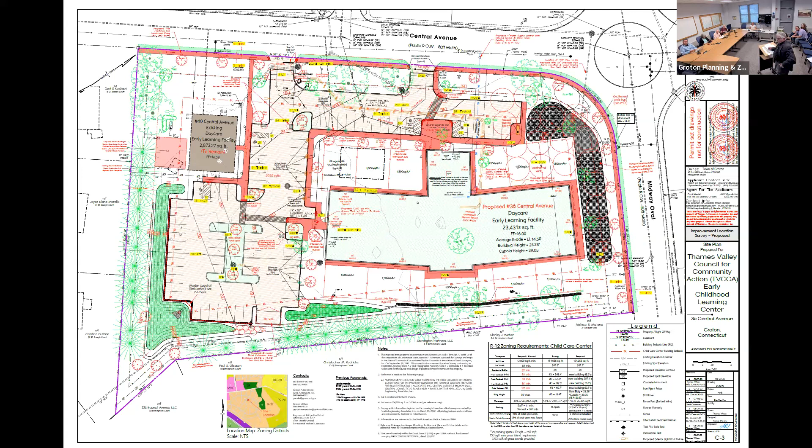So we do have a phasing plan. Paul, can you go to that last sheet? Actually, we were out there yesterday trying to come up with some type of compromise for this. I think that was the last sheet.

On the sheet that we provided as one of the revisions, with notes for the construction sequence, we're going to work with the contractor and TVCCA to try to maintain that one building. So what we're proposing now just came in - I think Deb, you might not even have seen this, we emailed this yesterday, so I'm sure you might not have seen it.

There is an area just in front of number 40 that's grass right now. So what we're proposing is to put temporary parking, processed stone and processed gravel there for students to get dropped off, and staff parking would be on the basketball court. There is a 24-foot right-of-way road going down the driveway for two-way traffic and emergency vehicles if need be. The yellow to the north would be all construction fencing, so the entire site would be protected.

So we propose all the construction to the north, and as the parking gets developed, we can close off the staff parking down below, complete the finished parking, and then complete the basins to the south that we need to get done. So that was one of our proposals.

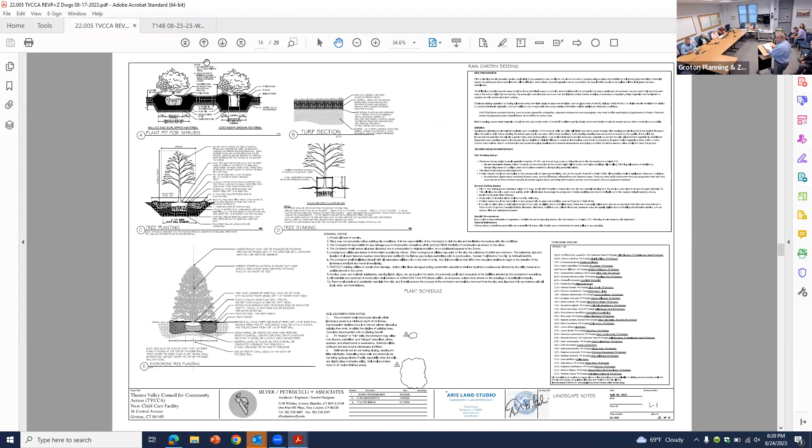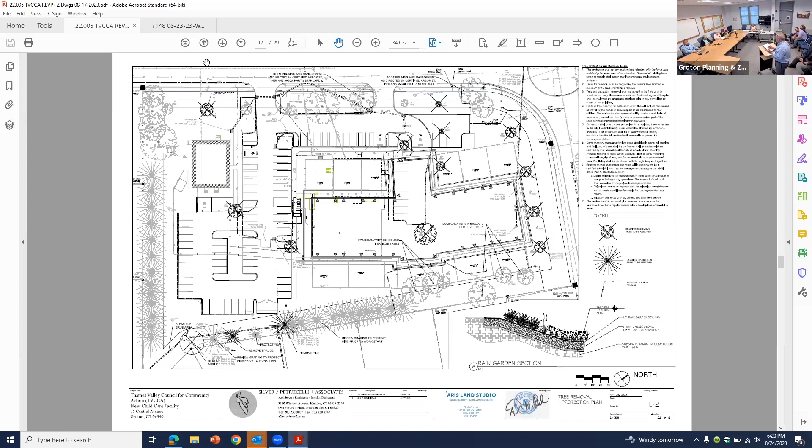So you've seen some of the planting plans, and based on the last comments, let's look at this tree protection plan. We're extremely aggressive in protecting existing trees because those root systems extend to the canopies, which this shows with fencing being very aggressive to protect those root systems. We'll have to work with the owner and contractor to stay on top of this, because contractors always want to park on their trees. So that's one thing to note.

If you go to the planting plan, another thing to note is that in our plans we call for decompaction in all of these landscape areas down to 24 inches, because construction equipment will turn it into concrete. Our goal is to end up with no more than 85% compaction, because that's what allows for tree root growth.

Some of the most recent comments we received had to do with making sure we're 5 feet off the sidewalk with all the street trees that surround the site, and we do that. Additionally, to utilize existing vegetation as a buffer, it would have to be 37 feet, so in lieu of that, what we did was supplement the plantings.

We have existing pines on the southwest and southeast side. We've supplemented that with additional evergreen plantings that include rhododendrons, some ilex, some leather leaf viburnum, which remain evergreen. We're trying to stay away from existing trees so we don't impact them, but still provide a robust buffer. Where we don't, we've added some more white pines and junipers.

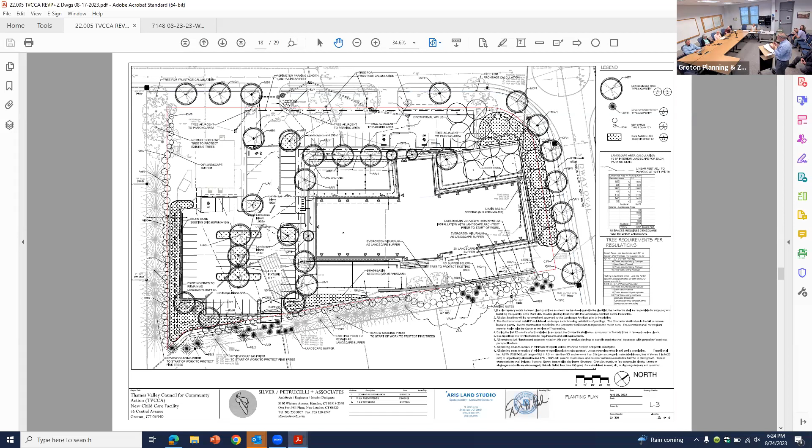And then the playground areas, except for 1 or 2 places, we stay completely out of them, because that's kind of a design and process. Naturally, I'd love to bring more trees into those spaces, but that's a whole other phase of it. That kind of sums it up, and I'm sure you'll have questions at the end. Thank you.

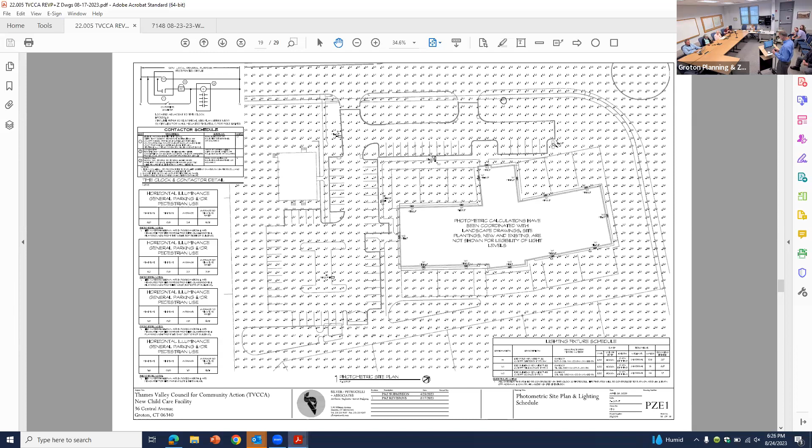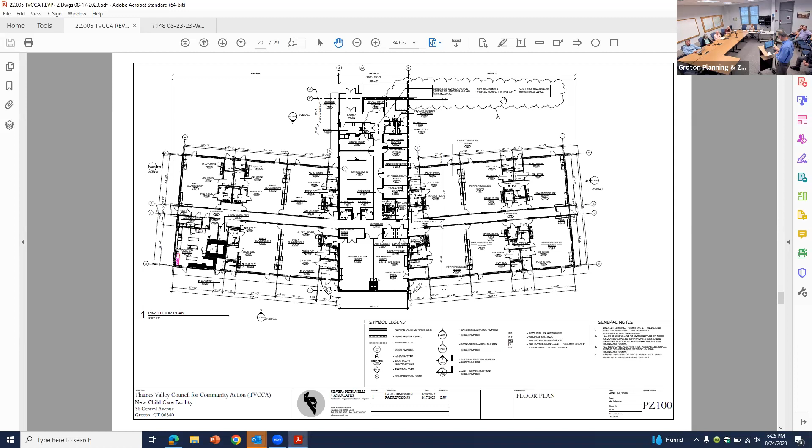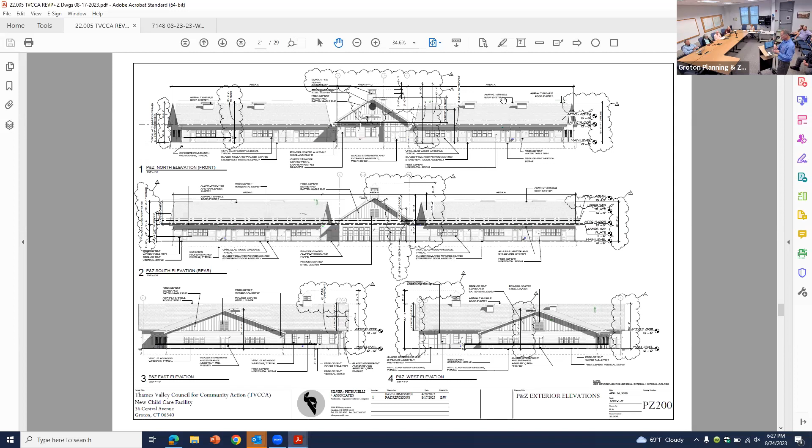The attics in the roof gables are being used by mechanical equipment. We have geothermal wells, but they're feeding equipment that is all located in the attic, so we really don't have much, if any, mechanical equipment on the site. All the equipment is really on or in the building itself.

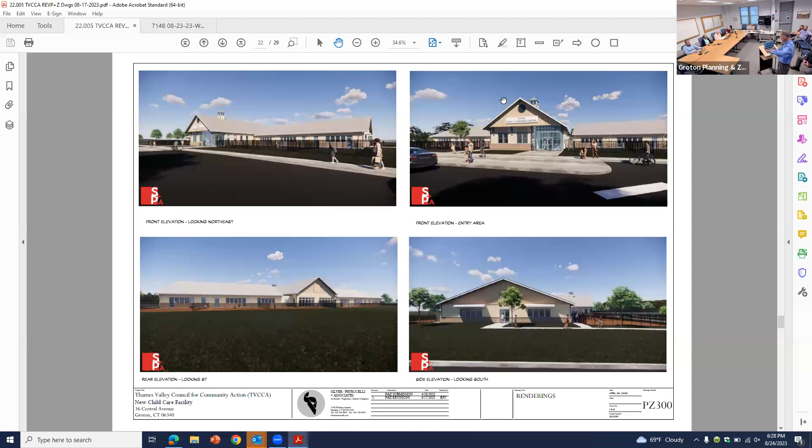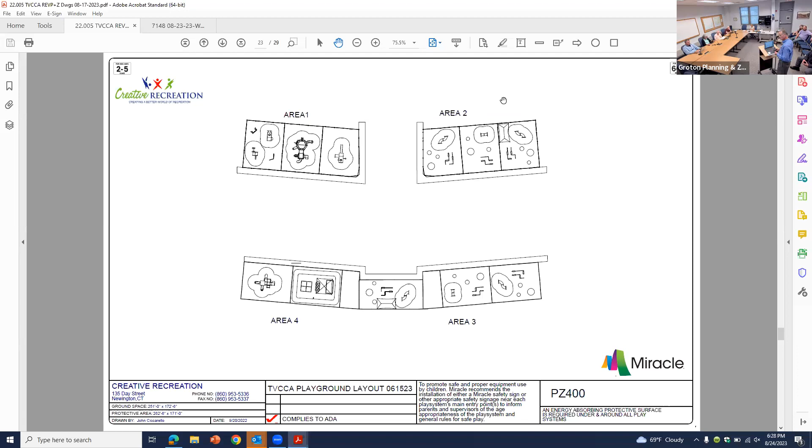We have signage as part of the project, and at this point I'll just breeze through the rest. This is the submission showing different plumbing and fire protection plans, for a fully fire protected building, and lastly the electrical plan showing the charging stations and lighting. With that, I'll conclude and open it up for questions.

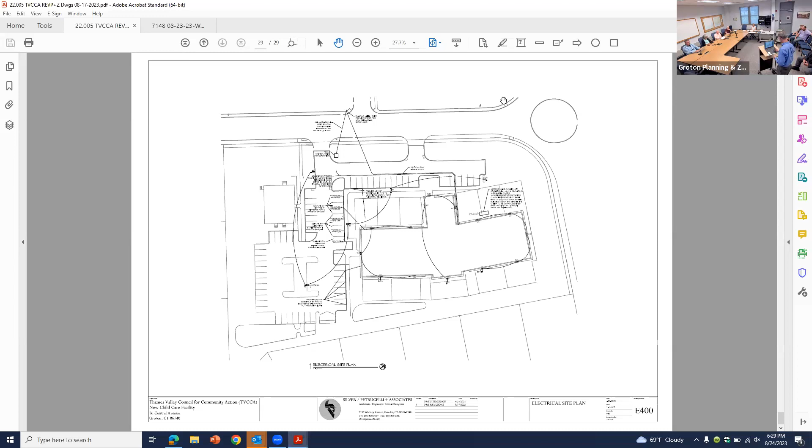I don't have anything else to present. Staff—sure, I'll try to pull this together here.

This is a 3.5 acre site in the R12 zone. Daycares are allowed by special permit, and you granted a special permit on July 11 of this year. The property is owned by the town of Groton and leased to the TVCCA, and has been used as a child care center since the 1980s. Several site plans and special permits were approved over time as it added buildings and expanded in small ways. The proposal here is to demolish 2 of the 3 existing buildings and the basketball court, leaving one building, 40 Central Ave, to remain as an active child care center. The new building will be approximately 23,000 square feet and will house up to 150 children.

The building at 40 Central Ave is going to remain in use during construction, and that has really been the main concern of all staff—how to keep those folks safe while there's construction going on next door, how parents will be able to access that building, and how the children will be able to play outside as required. And I'll be honest, we're not quite there yet.

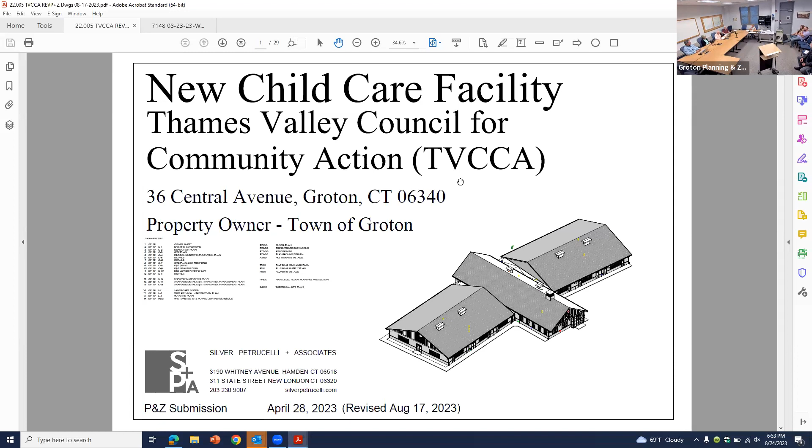Didn't have any real questions on the submittal, but the lighting issue could be handled as a technical issue. So what I'm hearing is that you want the lights to remain as shown on the plan, as opposed to what Public Works recommended, that height. Right, exactly. Okay, so no change necessary there.

We had questions over the CO, just ignore that. So that's what the construction phasing plan is going to address, yes. The phasing plan will outline what all needs to be done before the building is CO'd and before work starts on the second phase, so we don't have to address that separately. That is kind of wrapped into the construction phasing plan that I'm suggesting as one of the modifications.

In regards to the phasing, like I said, we went through various scenarios and we could never find a compromise to get the CO for the large building and keep that open at the same time. That's why we had a final plan that we presented a couple days ago.

So what we're proposing right now is to create a parking area up front, which is now grass. Parents can park and bring their children to the main entrance here, as they have in the past, and staff can park down there. There's going to be a construction fence; there will be no construction in this area at that time, so all this work can be done then. Once this parking area is established, we can abandon it and finish our stormwater mitigation.

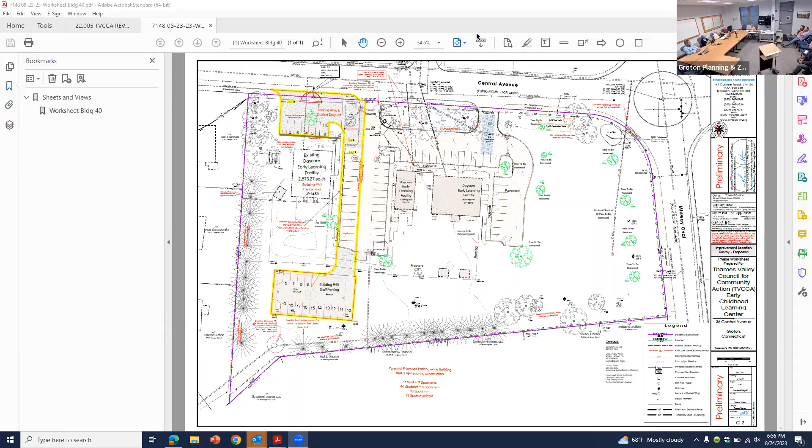I'm very supportive of that. So I just want to be clear on the phasing: we're going to need something that's pretty close to what can be built before the plans are filed in land records. I haven't seen this latest plan, but we'll look at it and get it figured out before the plans are put in land records. Maybe that's more of an administrative issue than something you need to deal with directly, but it has to be addressed.

So you have a motion as presented. I did have one change on the first paragraph: address the timing of drainage. I thought we could change it to address the sequence of timing. That makes sense, that's what they meant. It's really going to be a sequence that you tie relative to the other pieces. It's not the time, it's not that you complete all of one thing before moving to another; it's part of something ongoing.

So I'll make a motion to approve the site plan, SIT 2304, for TVCCA Child Care and Preschool Center at 36-38 Central Avenue with the following modifications: One, a detailed construction phasing plan that addresses the sequence of drainage, landscaping, and sidewalk installations, while prioritizing the safety of the children and staff using 40 Central Avenue, will be developed and placed on the plan. The sediment and erosion control plan shall be adjusted to be consistent with the construction phasing plan as necessary. Any revisions to the site required by Groton Utilities, the Fire Marshal, Public Works, or any other outside agency shall require additional review and approval by the Office of Planning and Development staff or the Planning and Zoning Commission as appropriate.